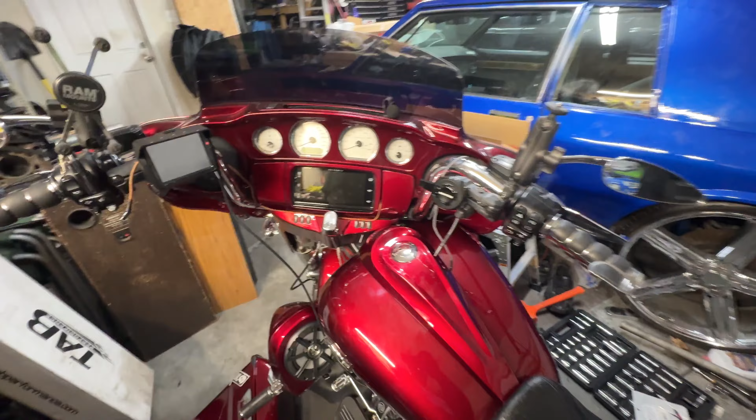So as we were talking about the other night, we were having issues, it didn't want to tune or read or whatever. Got it back home, took out the saddlebag, unplugged the fuse for the radio, and now it's doing exactly what it's supposed to do. I don't know if it's because I need to update the Maestro or what, but it seems like it only does it sometimes. It kind of picks and chooses when it wants to do it.

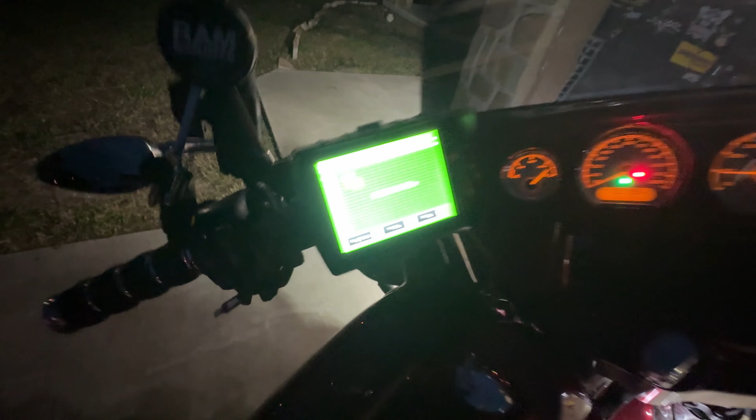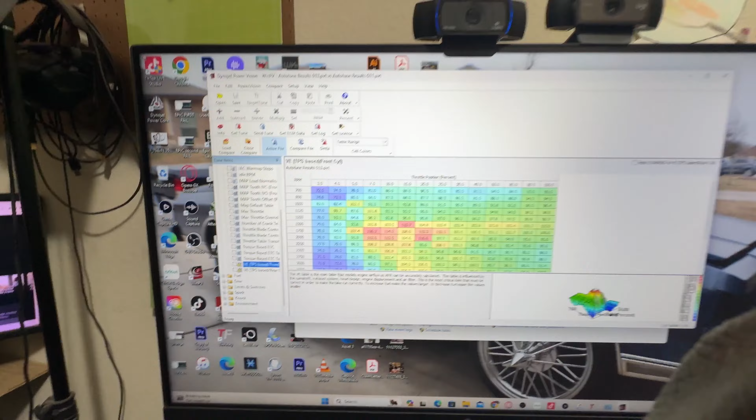Alright, so this is a little bit odd for me because I'm used to like HP Tuners and stuff, but I'm explaining it the best way I can. This has it pretty much comparing one file to the other. The only difference between the two files is the airflow, and that's highlighted by a little triangle there. This is DynoJet Power Vision WinPV, which is what you use for the Windows platform.

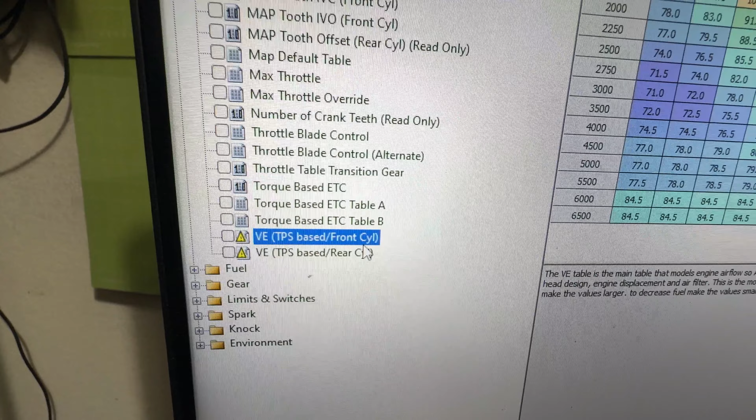The only two parts of this whole thing that have changes when you do the auto tune is the VE table, front cylinder and rear cylinder, and you can compare it to the active file - which would be the first one there, the 13 - and the 11, which is the file that was done on the other one. And then it'll highlight the differences made between the two.

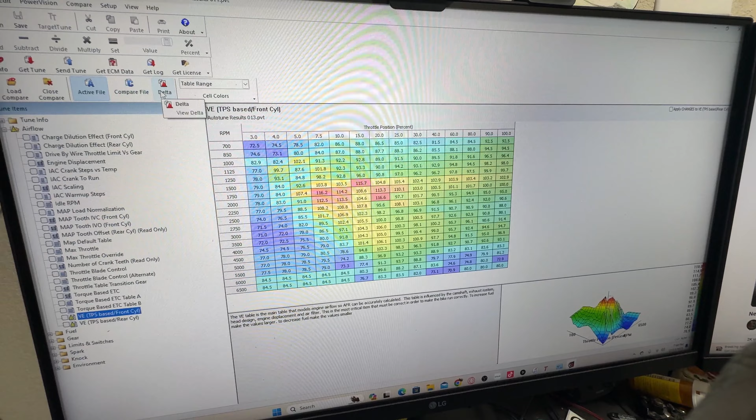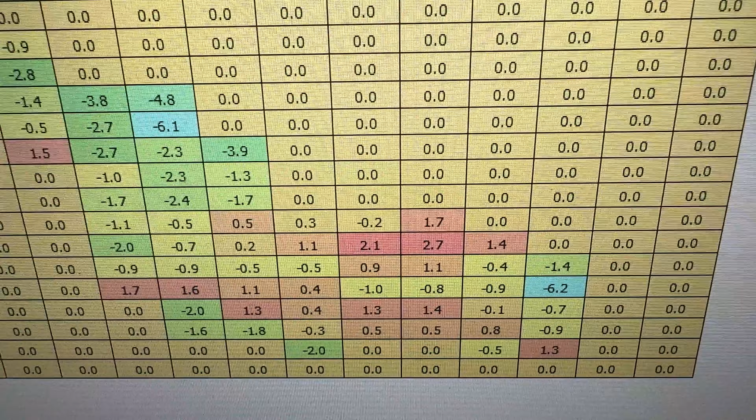So if we look here, it looks like it's adding, took out some here, subtracted, took out a little bit here, took out a little bit there. Well, added a little bit here, took out some here. So it's looking like it's needing just a little bit less fuel - minus 6, minus 4, minus 3. And then, of course, there's some spots where it's adding some in, but nothing drastic, nothing drastic.

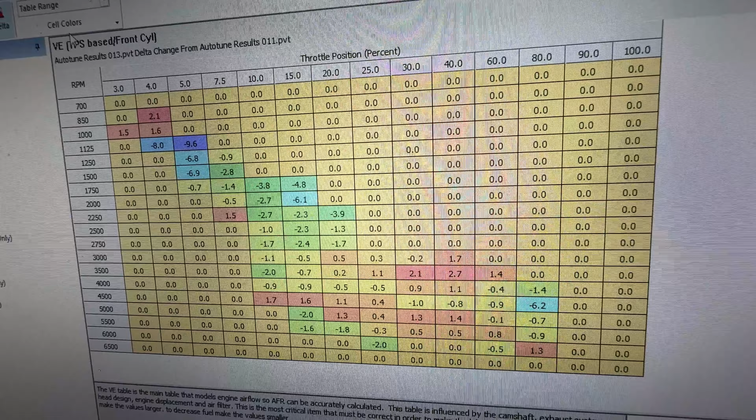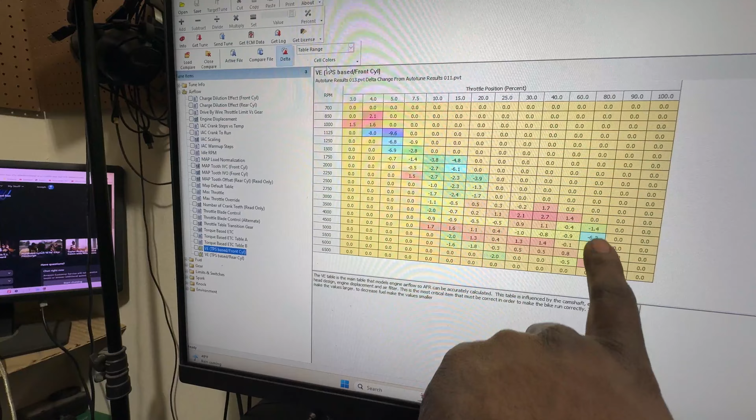Like I said, a lot of those are all kind of up to 80% throttle. Of course, I don't know how you would get to 80% throttle in any of these lower RPMs. Like how do you get to 80% throttle at 850 RPM or something like that? So realistically, you're not gonna hit all of these, but you want to hit as many as possible. So it looks like here at like 4,000, 4,500, we were hitting up in the 5,500s at 80% throttle - we had up to 5,500 RPM.

Looked like we hit about 6,000 right here, pulled a little bit of fuel, pulled a little bit there, added a little bit there. So the more and more you ride, the better it'll do.

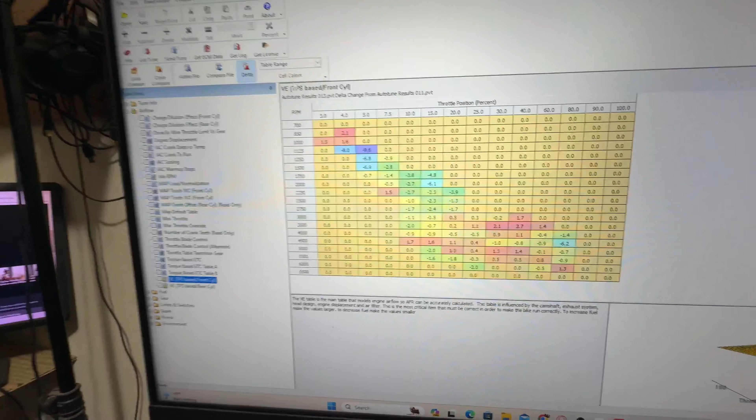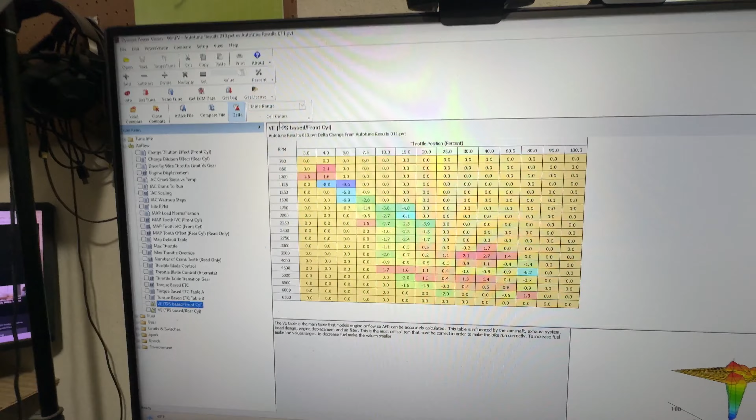That was just a short around town thing. So the next time we head to Georgetown or Temple or Waco or wherever it is, we'll do it. Like I was saying, the more we ride and go different places, you can continue to hit cells.

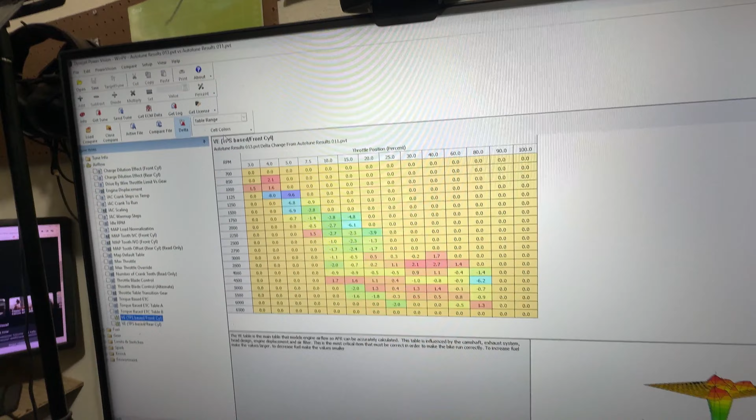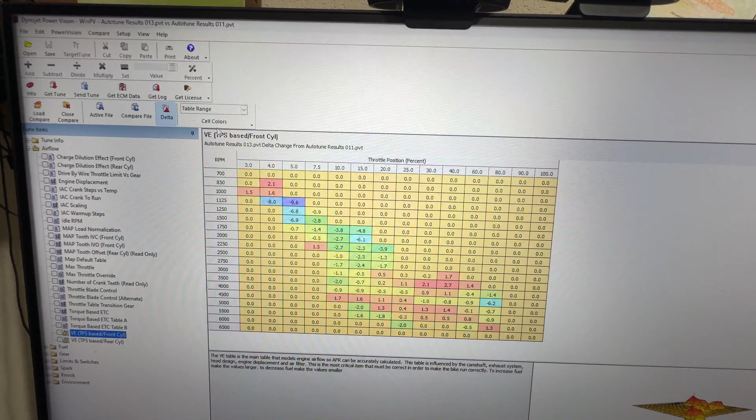Probably next time I'll just ride and ride and ride. I'll probably tune up until we have a whole bunch more changed cells.

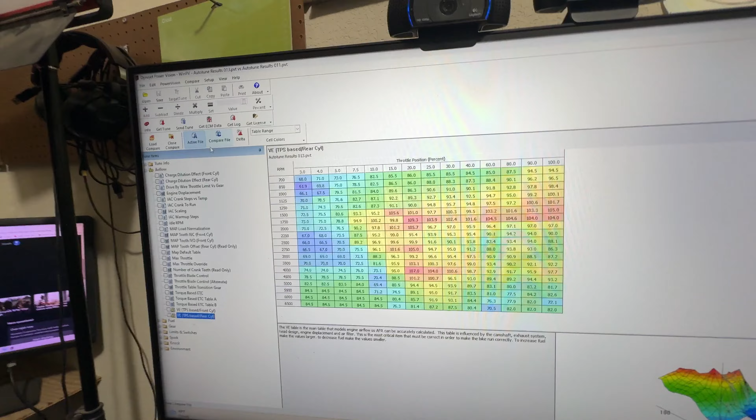So that was for the front cylinder. If you look at the rear cylinder, you've got the active compare. Same thing back here - adding some fuel on that second cylinder, pulling a little bit, adding a little bit, pulling some there, and pulling some down here.

These were the at-idle squares, so those got the full 99 hits in these boxes right here. As you went up, some of those things may or may not have needed it. The ones that have a 0, of course, we didn't hit those cells and nothing was changed.

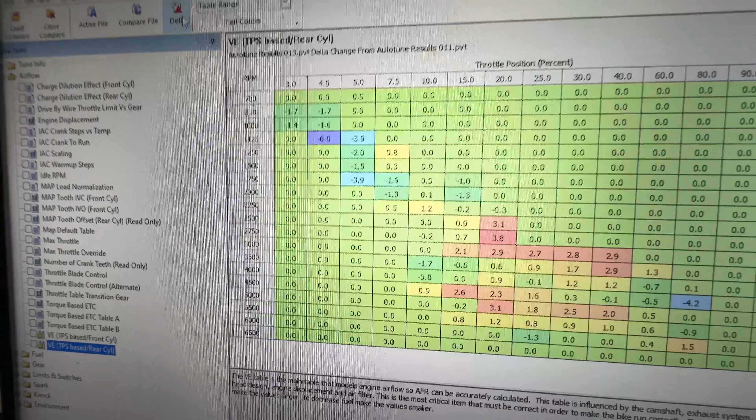Like I said, the next time we do it, we won't necessarily be in a rush to tune it. We'll do it over the course of maybe a week - we'll ride and tune, ride and tune, ride and tune. Then at the end of that week, we'll save that data, bring it to the computer, save it here, and load it into the bike too.

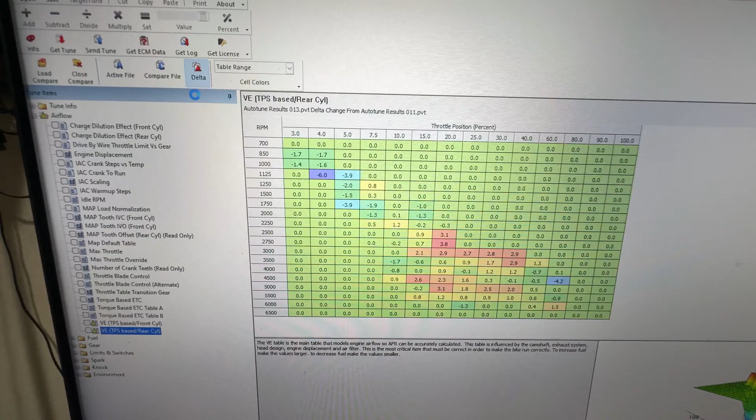Also, if there's something - say you get the tune, you can click get tune. It'll be active and pull up all the things that are on the Power Vision.

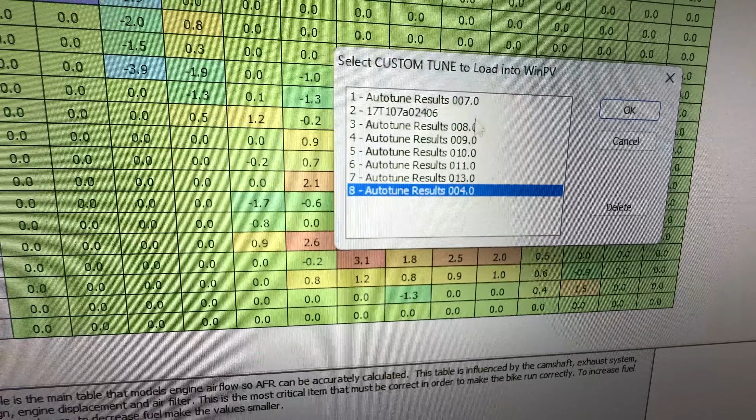So technically, 9, 10, 8, 9, 10 - like is obsolete, especially 4 is obsolete. So 4, well actually 7, 8, 9, 10 is obsolete. Technically 11 is obsolete too. So really the only thing I need is 13, to be completely honest.

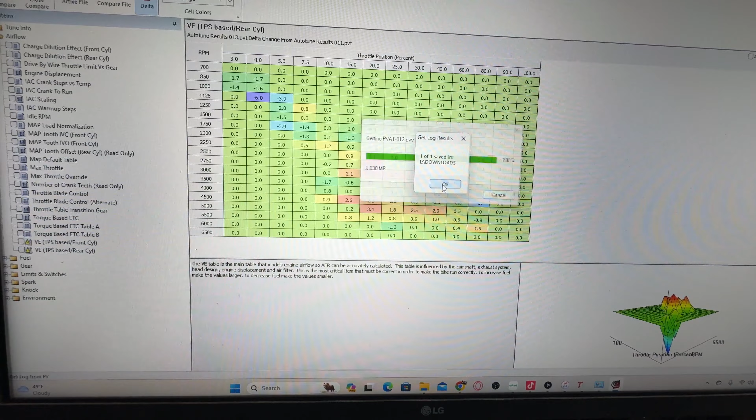Let me cancel out of that. It says get log. Let's see, get... okay, so that's saved to downloads. Let's see what that is, because that's going to be something totally new.

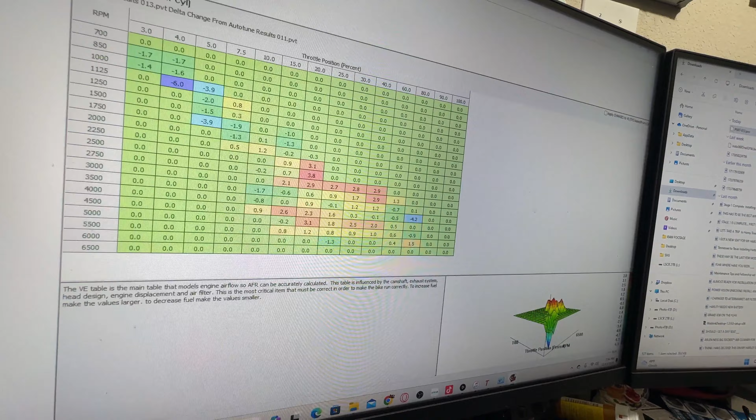All right, let's try something. So, file, open. Those are downloads. All files, open. I don't know exactly what you've got to do to read it.

I'm not exactly sure what I need to do to get the actual file read, you know what I mean? So we're going to exit that there. But I do have the file, I just don't know what we can read it with. And that's that last one.

That's 13, and then I'll probably get the log for 11. Get... select folder. Alright, so we got both of those.